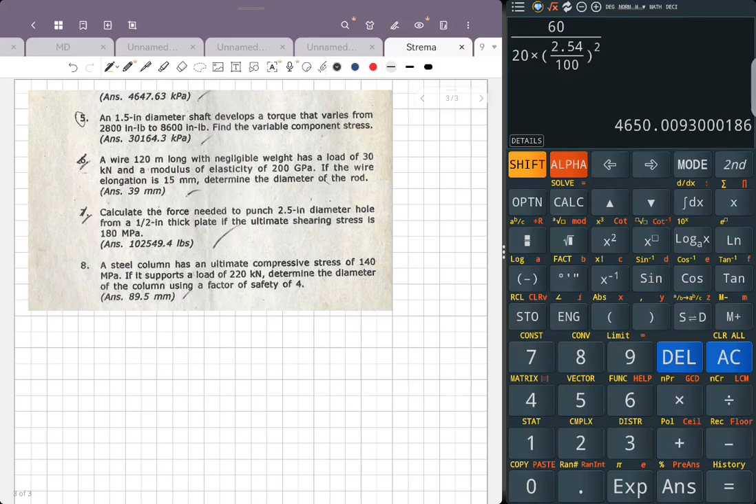Okay? So, number 5. A 1.5 inch shaft diameter develops torque that varies from, okay? Meron kang variable torque. 2,800 and then 8,600 pound-inch. Find the variable component stress. Ano yung variable component stress? So, anong stress yun?

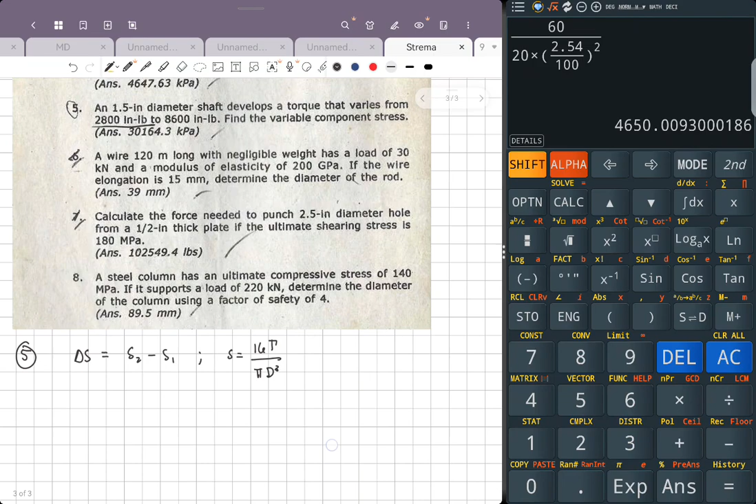So, we know that delta S, number 5. Delta S is S2 minus S1, whichever is maximum. Pero yung induced stress is 16T over pi d cube. 1.5 inch. So, ang nagbabago lang naman dyan, yung torque. So, pwede ko palang gamitin na yung delta S is equal to 16 times T2 minus T1 divide by pi d cube. Di nagbago yung size ng shaft. Variable lang yung torque. So, solve natin.

16 times torque 2, that is 8,600, minus 2,800. The unit is pound-inch. Per pi, diameter is 1.5 inch. Cube the value. So, ang lalabas dito will be pound per inch squared. So, gawin natin kPa. You'll have 101.325 kPa every 14.7 PSI. Cancel all same units: pound, inch cube, inch, PSI. Ang lalabas is kPa.

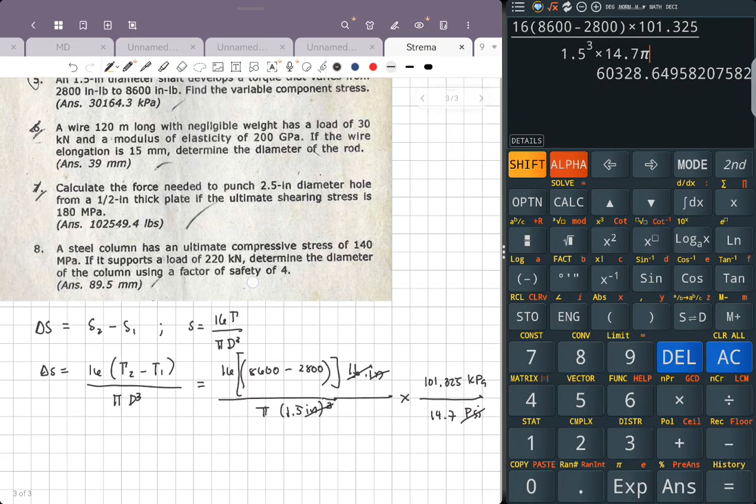So, 16, on the spot ko siya sinasagutan ha. 8,600 minus 2,800 times 101.325 divide by 1.5 cube times 14.7 times pi. Find the variable component stress. So, average pala. Divide by 2. Variable component stress divide by 2. This will be 30164.3247 kPa. Basic again. Ginamit lang natin yung ating utak.

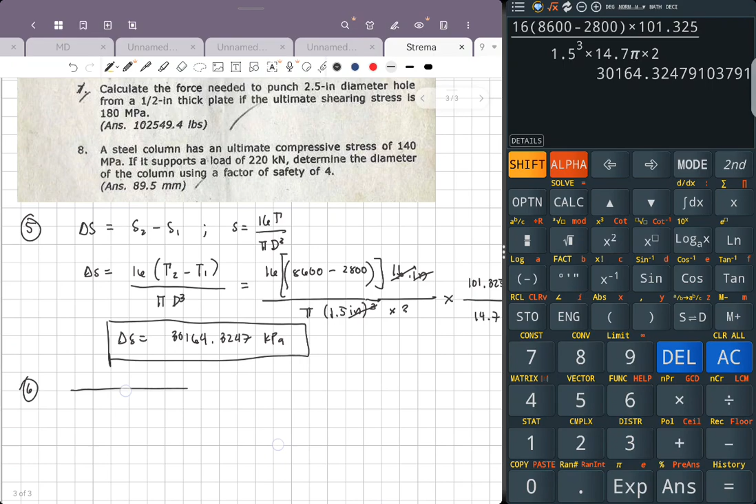So, number 6. A wire 120 meters long with a negligible weight has a load of 30 kilonewtons and the modulus of elasticity of 200 GPa. If the wire elongation is 15 mm, determine the wire diameter. Parang nakasuspend siya. Ito yung rod. Length na 120 m, E is 200 GPa. Elongation, yung inilaki niya, is 15 mm. Load is 30 kilonewtons. Ang hinahanap is the diameter of the rod.

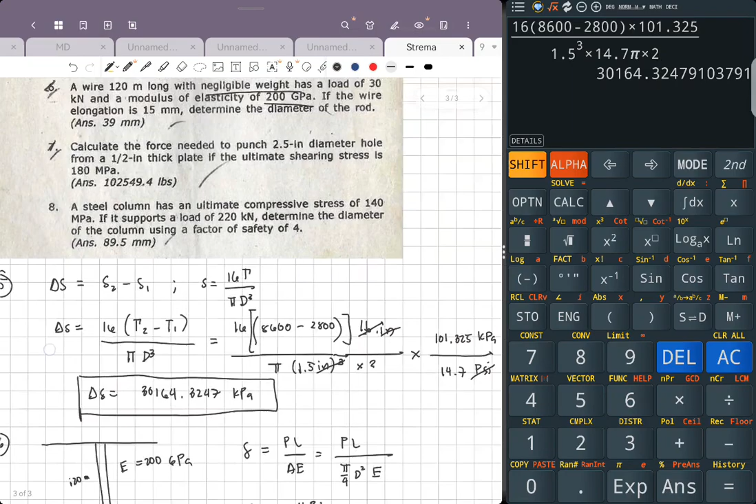So, elongation is equal to PL over AE. Area ng rod, pi over 4 D squared. Simplify natin. Elongation is equal to 4PL over pi D squared E. Kukunin natin si D. D squared equal to 4PL over pi times elongation times E. Square root. P is 30 kilonewtons, gawin natin 30,000 newtons. The length is 120 meters, times 1,000 para maging millimeter.

Divide by pi times 15 mm times E, 200 GPa, so 200 times 1,000 Newton per millimeter squared. Cancel all same units. Ang natira, millimeter squared. 4 times 30,000 times 120 divide by 15 pi times 200. So, D is equal to 39.088 mm. Basic ang number 6.

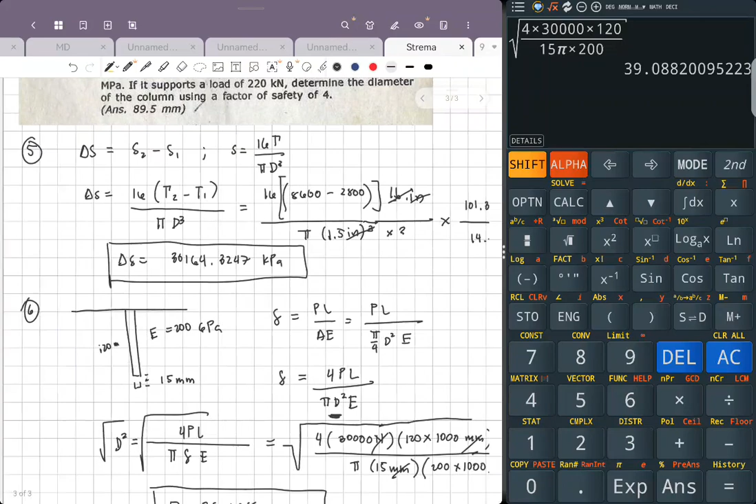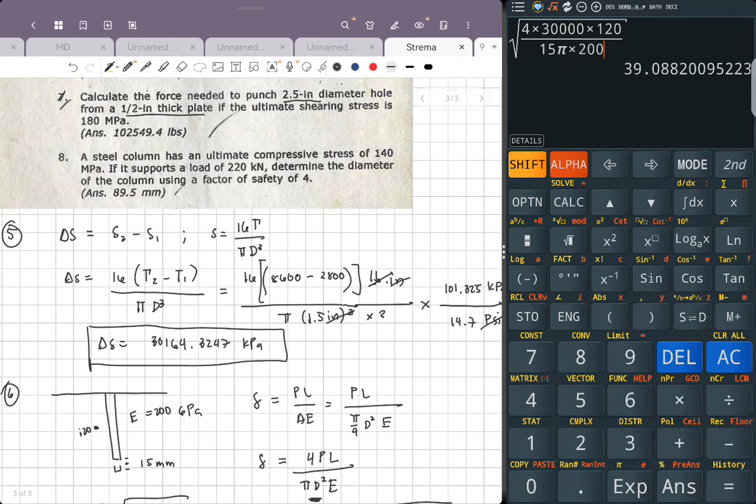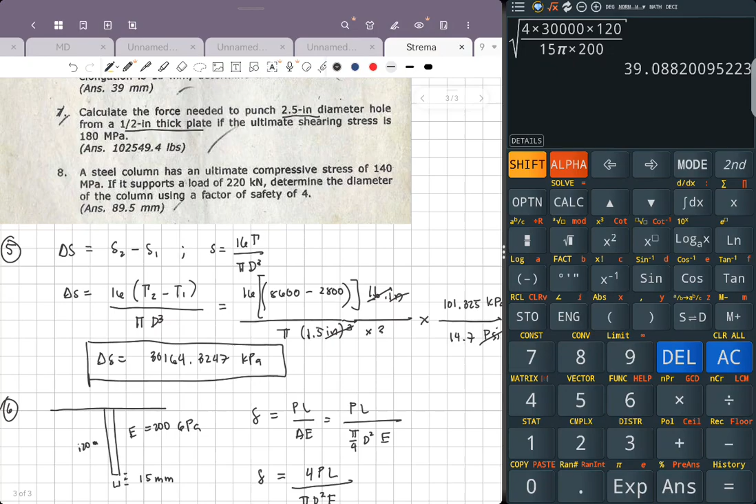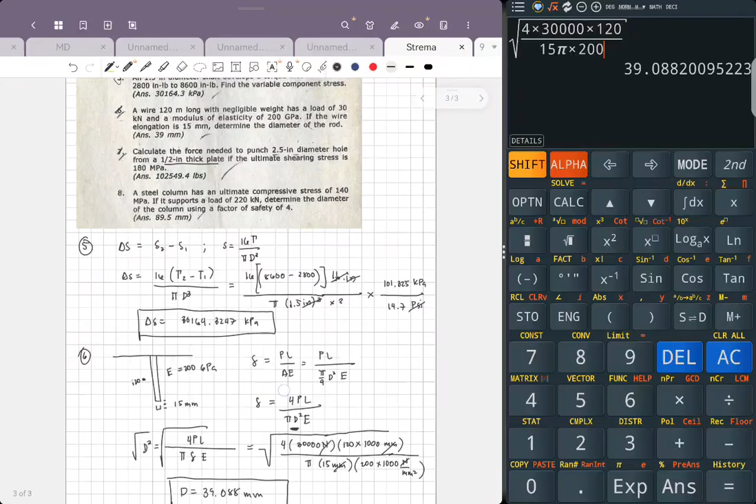Number 7. Calculate the force needed to punch 2.5-inch diameter hole in a 1/2 inch thick plate. Punching: diameter, thickness, ultimate shearing stress. SUS is force divide by pi diameter times thickness. So, force is equal to pi d t times SUS. Pi times 2.5 times 0.5 inch squared times SUS.

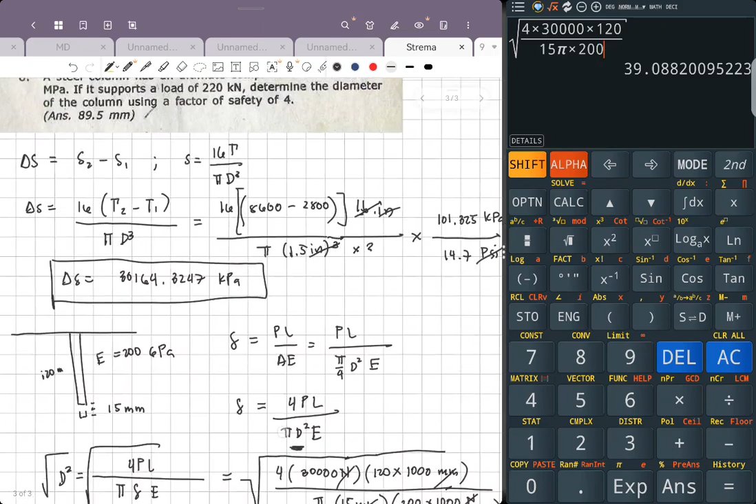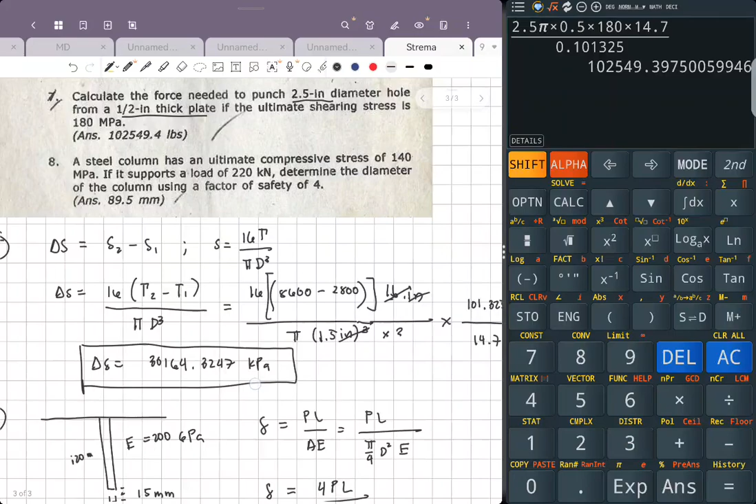Kailangan ko dito is in pounds. SUS is 180 MPa times 14.7 PSI divide by 0.101325 MPa. Pounds na agad yan. So, 2.5 times pi times 0.5 times 180 times 14.7 divide by 0.101325. The answer is 102,549.4 pounds.

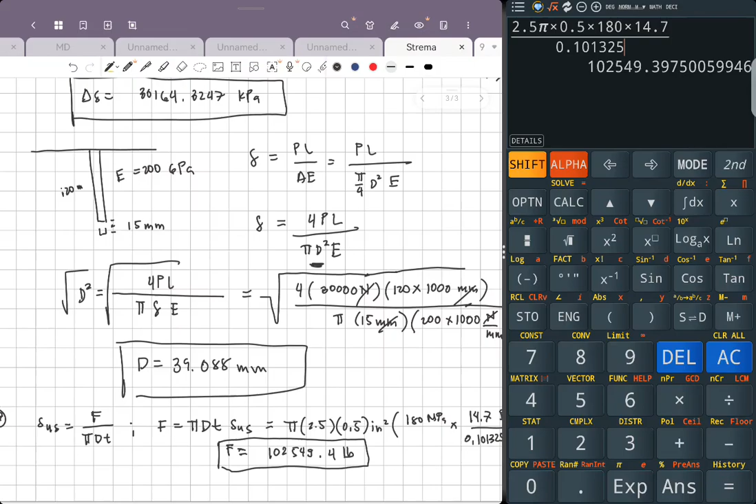Basic, di ba? On the spot, sinosolve. Pag nag-solve kayo, isip muna, tapos solve. Kaya nyo yan. Tagal ko na hindi nag-i-strength of materials.

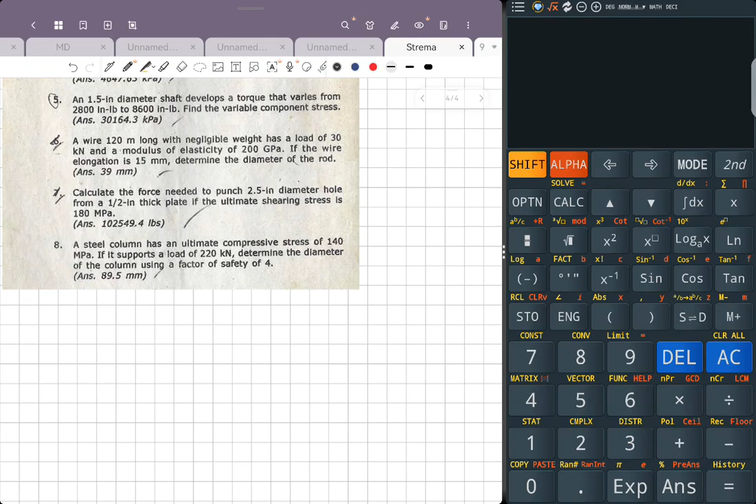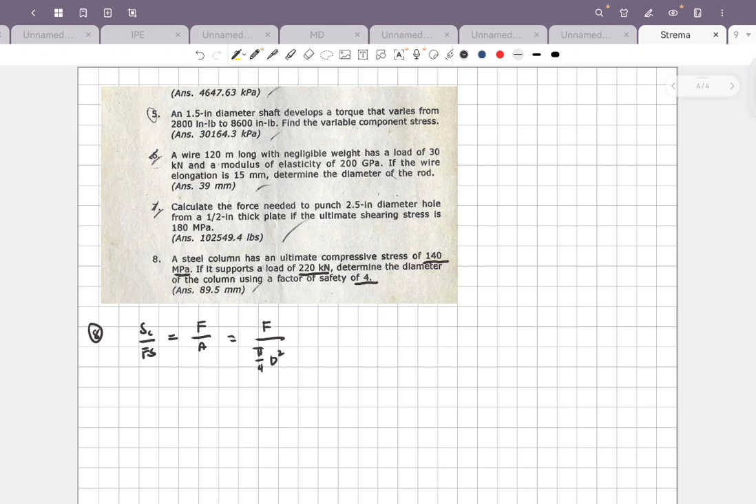Last problem, number 8. A steel column has an ultimate compressive stress of 140 MPa. It supports a load of 220 kilonewtons. Determine the diameter of the column using a factor of safety 4. SC divide by FS is the stress, equal to force over area, pi over 4 d squared. So, SC over factor of safety equal to 4F divided by pi d squared. Ang kailangan ko yung d.

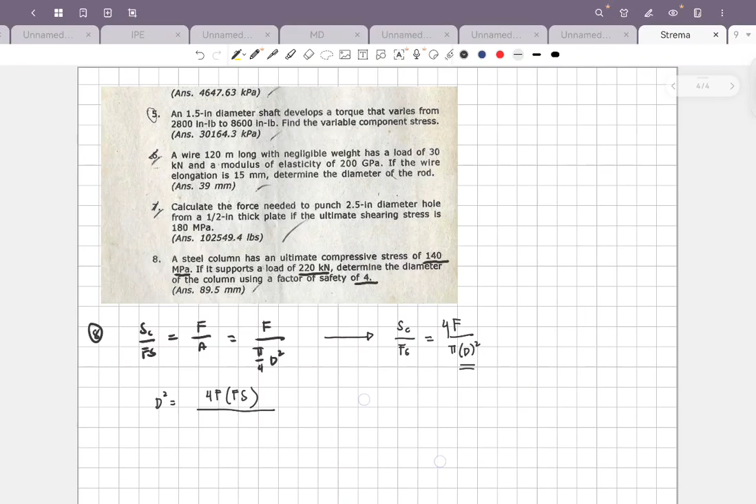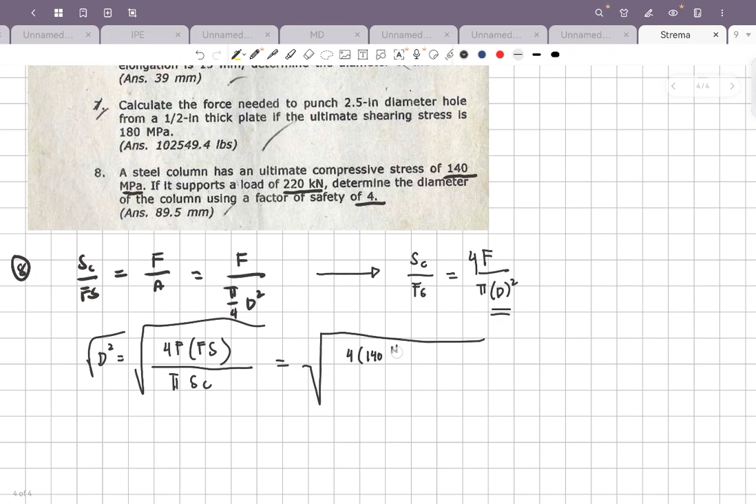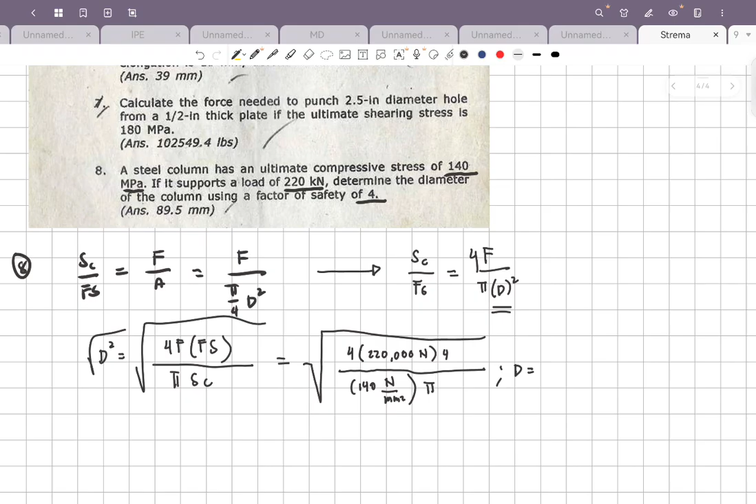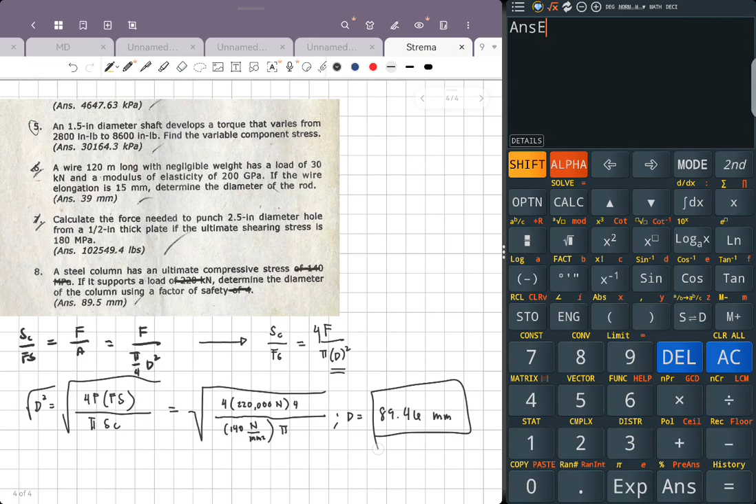d squared equal to 4F times factor of safety divided by pi SC. Square root. 220,000 newtons times 4 times 4, divide by 140 newton per millimeter squared times pi. Pindot na lang sa calculator. The answer is 89.46 mm. Very basic. Kayang-kaya, di ba?